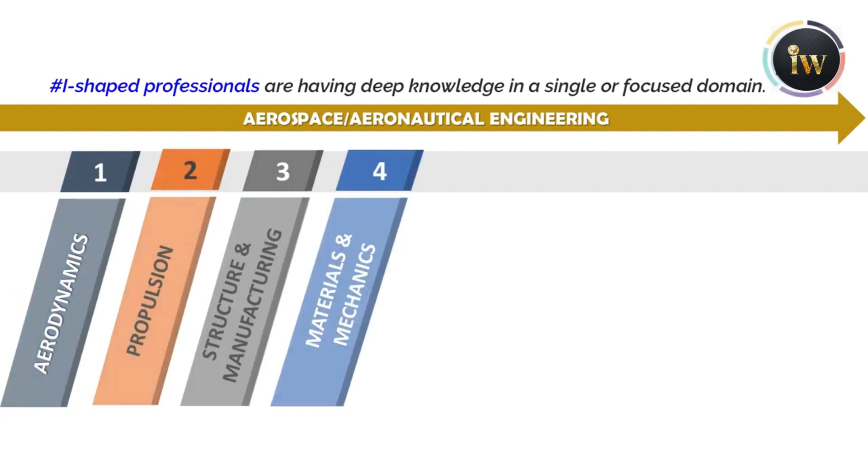T-shaped professionals means single or focused knowledge with collaboration across domains. For example, how the applications of aerodynamics are widely implemented in supersonic, subsonic or even hypersonic fields in the aerospace domain.

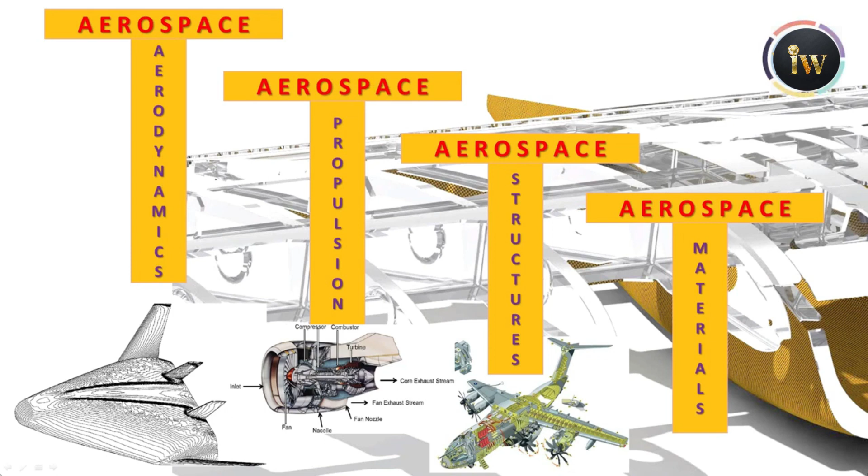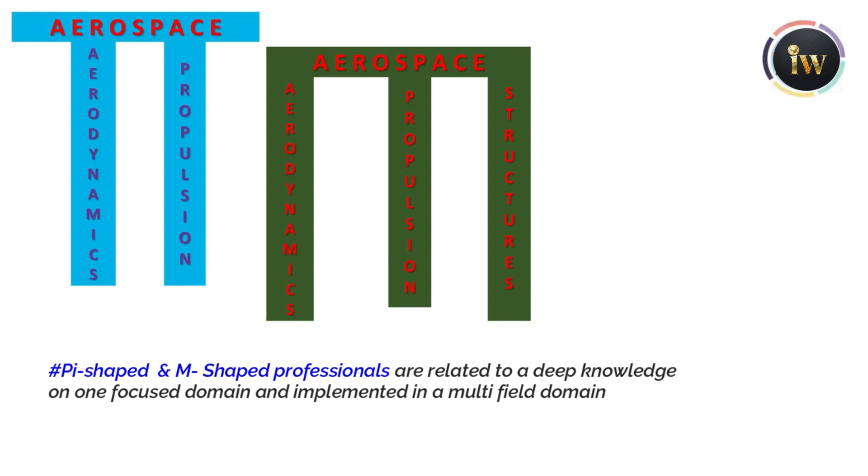Now talking about pi and M-shaped professionals, they have deep knowledge in one focused domain but implemented in a multi-field domain. It's like compiling a combo of aerothermodynamics, structures, controls into one research topic. For example, aerodynamics and aerothermodynamics of a re-entry vehicle. Here you must have knowledge of more than one domain, like aerodynamics as well as propulsion, so it will be considered a pi-shaped professional.

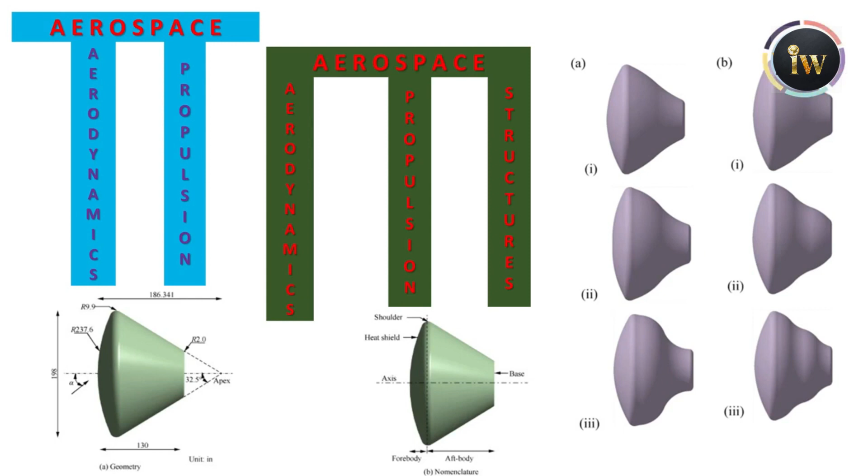Today I will discuss possible aerospace research topics or thrust areas based on I, T, pi and M-shaped professionals of each aerospace domain like aerodynamics, propulsion, structure and manufacturing, materials and mechanics, design and control, space engineering, aviation management and aerospace medicine.

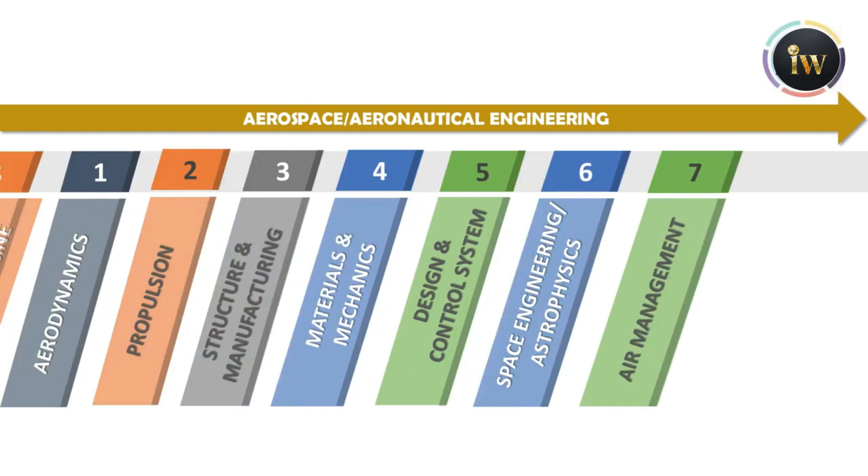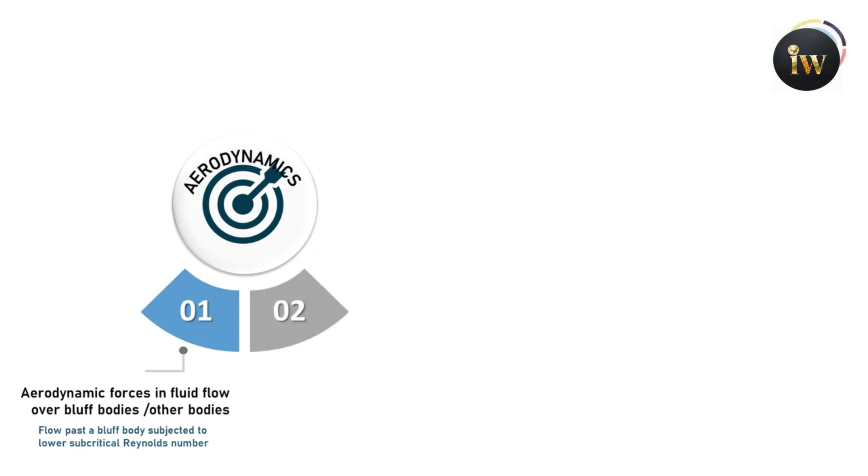Let's start with applied aerodynamics, which covers a broad range of research topics both in the aerospace domain as well as multi-field domains. Any research work on aerodynamics is evaluated either through scientific computing, CFD and numerical methods, or by experimental investigation. The most possible topics are aerodynamic forces in fluid flow over a bluff body or any other body, and second, unsteady flow or transitions and turbulence or vortex dynamics.

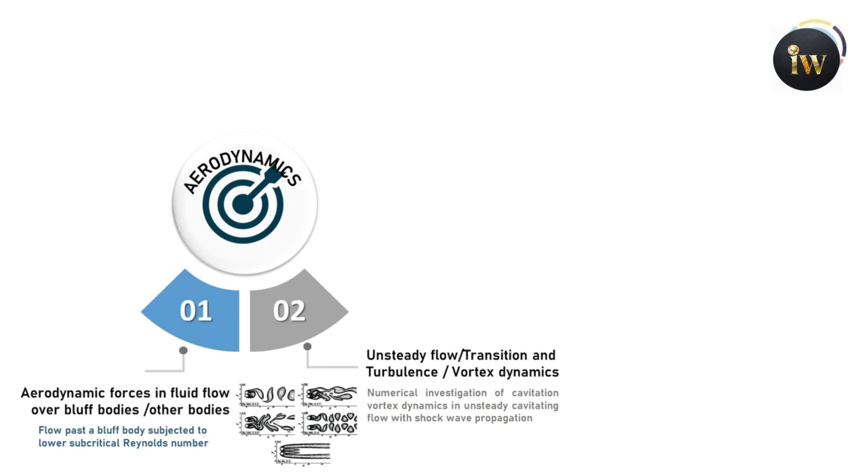For example, numerical investigation of cavitation vortex dynamics in unsteady cavitating flow with shock wave propagation. Then internal flow or flow control, which can be either active or passive control of jets, like large eddy simulation of base drag reduction using jet boat tail passive flow control.

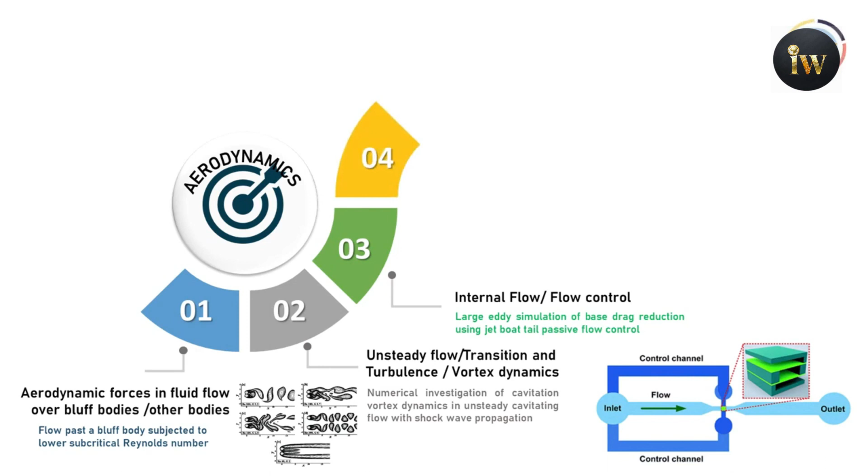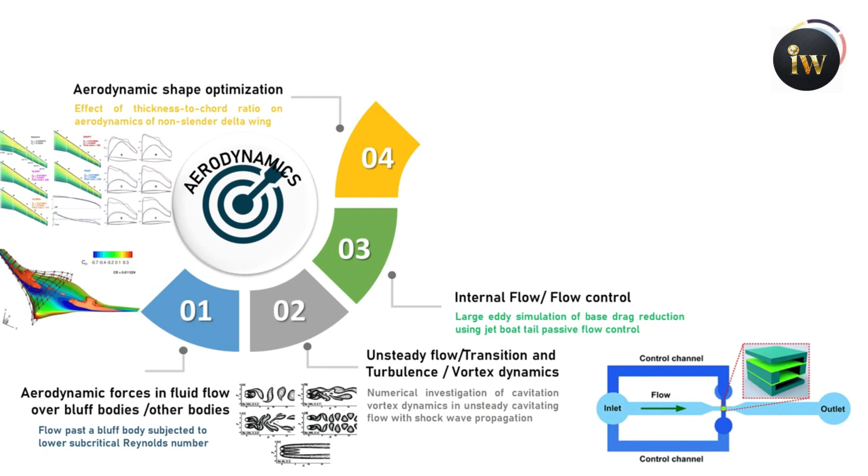Then aerodynamic shape optimization, widely used in the aerospace field, such as the effect of thickness-to-chord ratio on aerodynamics of a non-slender delta wing. There's a lot of research you can do on various configurations of the delta wing too. Then experimental fluid mechanics or wind tunnel techniques in subsonic, supersonic or even hypersonic fields.

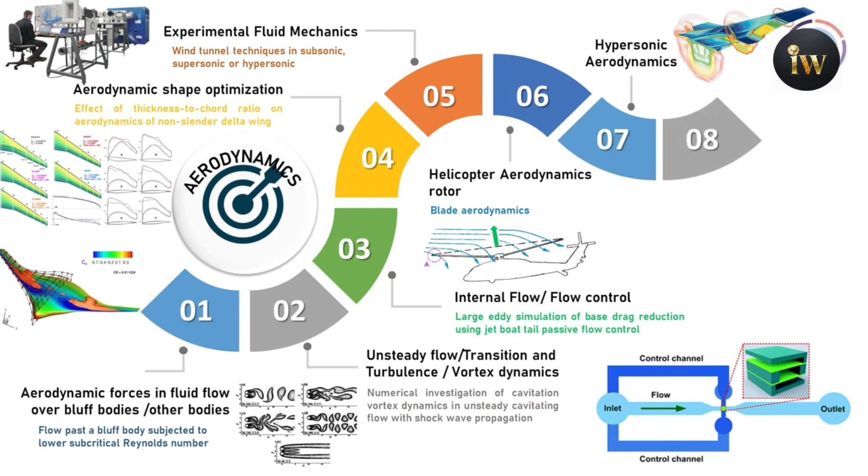Even missile aerodynamics, for example, investigation of acceleration effects on missile aerodynamics using computational fluid dynamics. There's ample research going on. Such amazing topics you can also pick, like effects of rainfall on aircraft aerodynamics or crosswind effects.

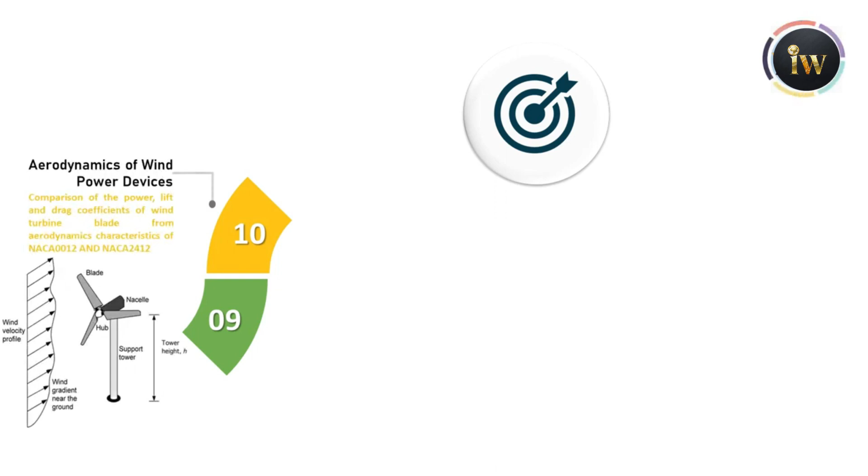Now I will tell you some aircraft aerodynamic concepts applicable in other fields, like aerodynamics in wind power devices, such as comparison of power, lift or drag coefficients in wind turbine blades, or other aerodynamic characteristics varying the airfoil.

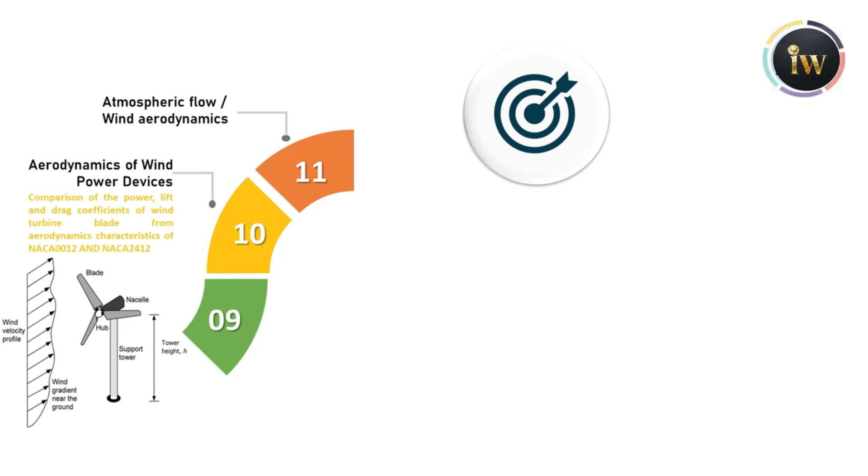Then talking about atmospheric flow or wind aerodynamics, again some more precise research can be done on microfluidics. Then aerodynamics of road vehicles like sports cars or even high-speed trains, bicycles.

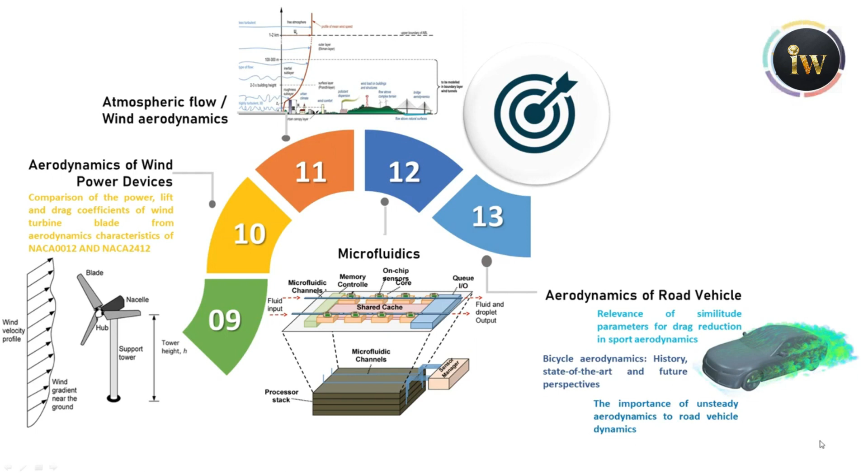Actually, these are industrial applications of aerodynamics. There's a lot of research going on, like relevance of similitude parameters for drag reduction in sports aerodynamics or even bicycle aerodynamics, even the importance of unsteady aerodynamics to vehicle dynamics. There are a lot of industrial applications going on too.

Then even marine vehicle dynamics, building or bridge dynamics. You might have heard about the Tacoma bridge incident. That has also been further studied in terms of bridge dynamics, and now we have made better advancement in the research. All these individual topics represent the I-shaped professional.

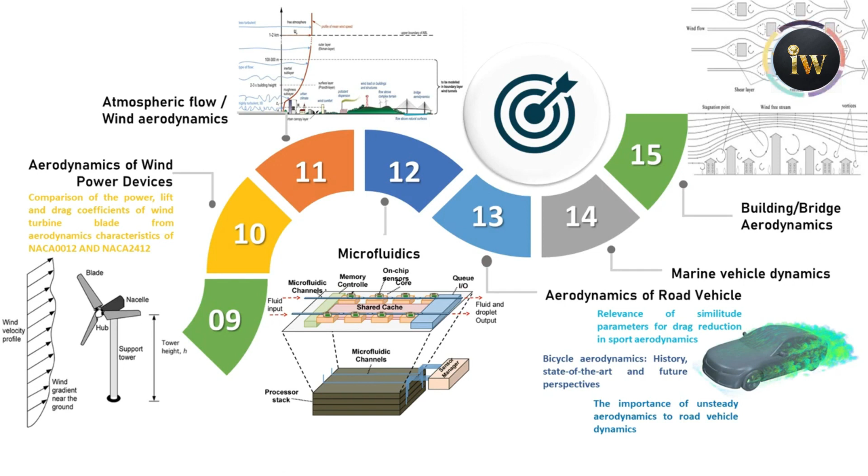Suppose a person is combinedly working on blade dynamics along with atmospheric flow and experimental fluid mechanics, they will probably fall under the T-shaped professional. In upcoming talks, I will give you examples of how research work can be compiled with other domains like propulsion, structure and so on. So stay tuned till the end of the video.

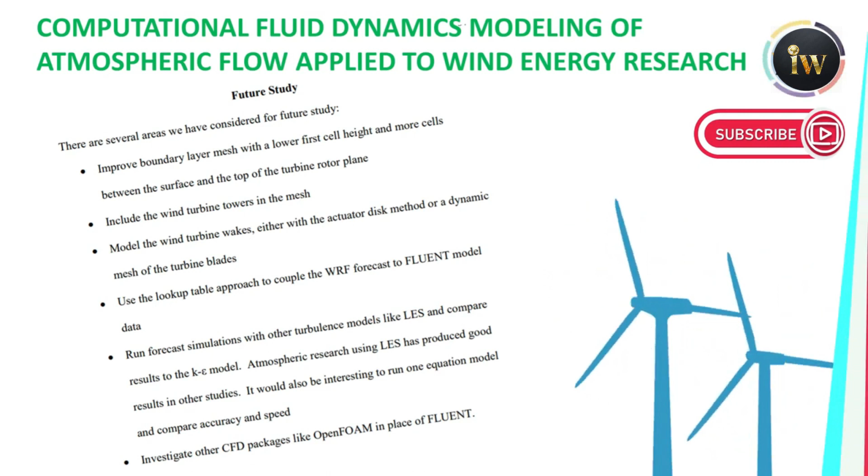Next, I will move to the propulsion research topic, sometimes also called the thermal and propulsion core. In air breathing propulsion, you can now work on inlets, diffusers or nozzles for various flight speeds. Even advanced inlets and nozzles for subsonic, supersonic and hypersonic vehicles you can work on.

Even combustion fuel flow reactions can also extend to fire dynamics. Then even turbo machinery, where work defines on the compressor and the turbine.

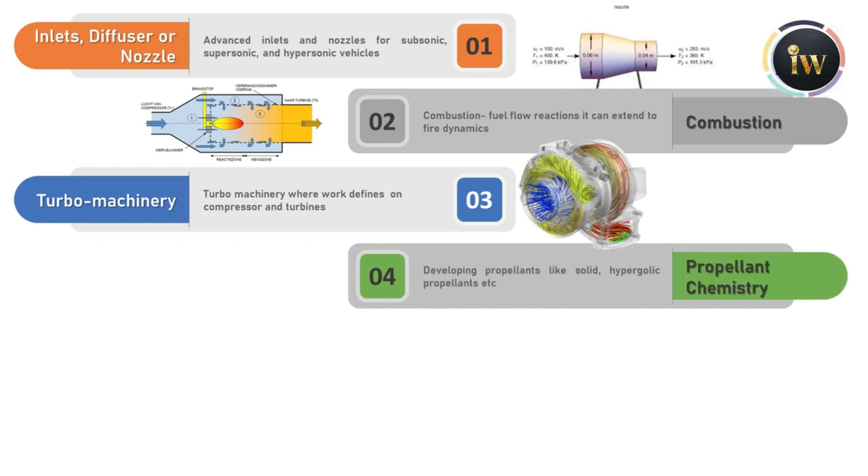If I talk about rocket propulsion, there is a lot of work going on in developing propellants like solid, hypergolic, monopropellants. Sometimes this is also known as propellant chemistry. You can do research on it.

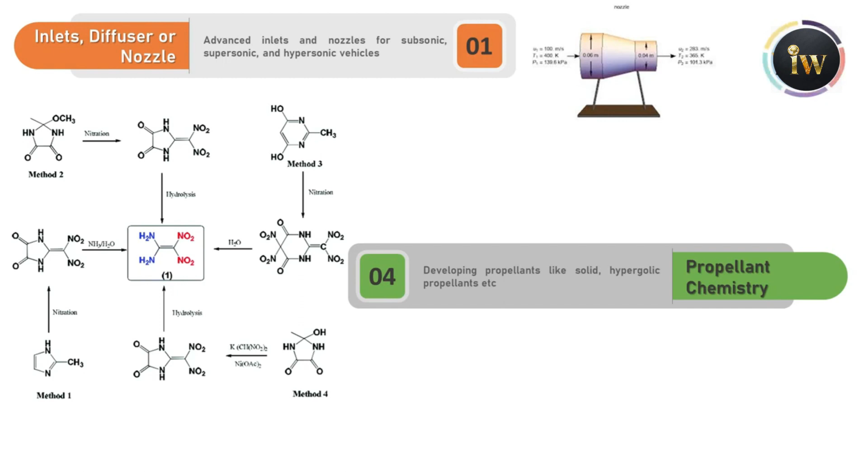Then electric propulsion. Now microgravity, where NASA is experimentally working, and even CubeSat, all of you might be knowing. That is also a part of electric propulsion.

Then talking about thrust vectoring, either primary or secondary, it is widely used in rocket propulsion or in space, either for the rocket or the spacecraft.

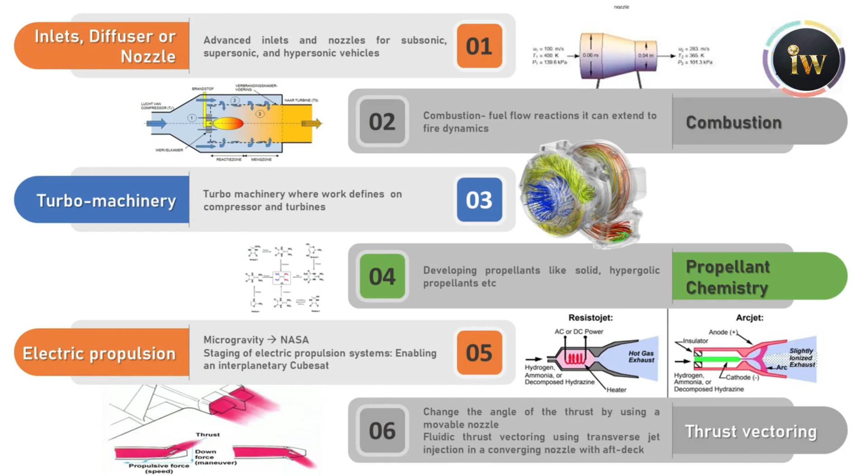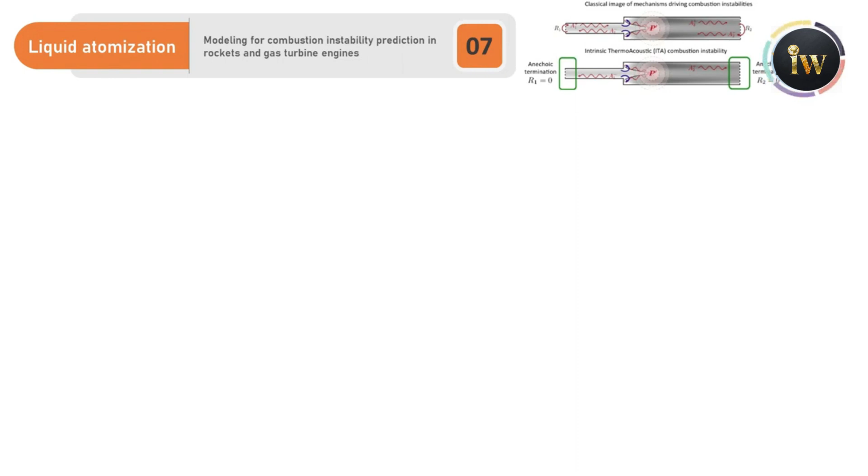Then coming to liquid atomization and spray combustion, this also plays a very important role. Similarly, you can work on modeling for combustion instability predictions in rockets or even gas turbines.

Heat and mass transfer plays a key role either in air breathing or rockets, spacecraft, or even automobile industries. Then cooling techniques - when we talk about thermal, there must be some kind of cooling techniques. This is very important and also plays a key role, and cooling directly or indirectly affects efficiency.

So another work you can do is cryogenic applications. There are wide opportunities to work on cryogenic applications either in the engine or the fluid. You can work on this by various means.

Then another very special topic is bio-inspired propulsion, like biofuel. Basically it is a multidisciplinary profession where one needs to have an idea about vegetable oils or even aviation fuel and its composition. There is a lot of research going on since 2005, I think.

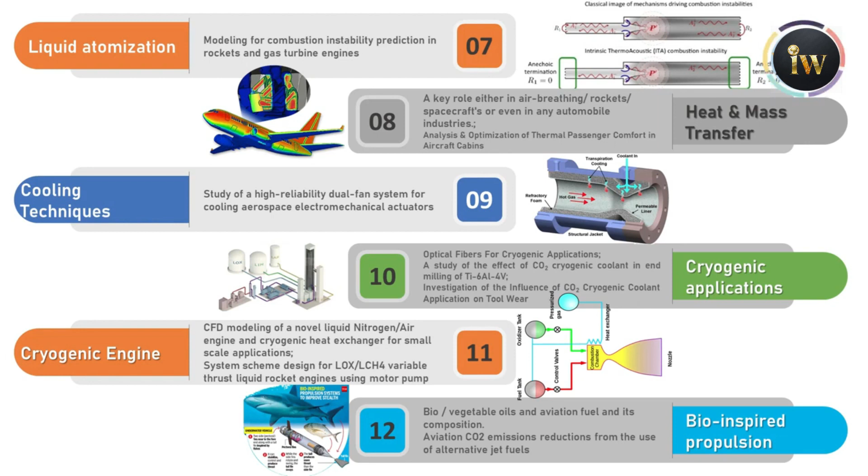Even some industries, aviation industries, are working on this. You can see an example: aviation CO2 emission reductions from use of alternative jet fuels. There is a lot more research you can do on it.

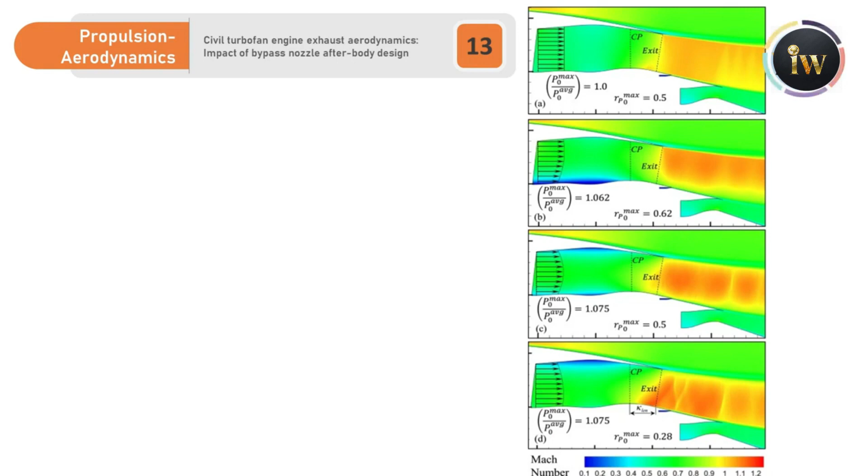But there are certain research topics where the movement of air is crucial to both the aerodynamic vehicle and the efficient engine, so it can't be isolated from aerodynamics and propulsion. Some research has been undertaken on civil turbofan engine exhaust aerodynamics. There is a lot of research going on; you can also take up one of these.

Then flame propagation and ignition in boundary layer flow. Then multi-phase reactions forming a complicated system, either in the form of gas-liquid, gas-solid, or liquid-solid interface.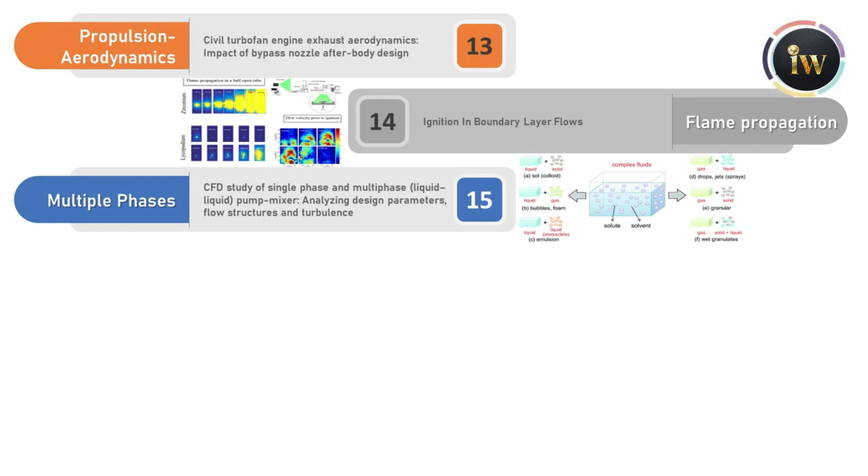There are also a lot of projects going on in CFD study of single-phase or multi-phase pump-mixers, or even in a rocket engine, when the cooling system is done in a cryogenic rocket engine.

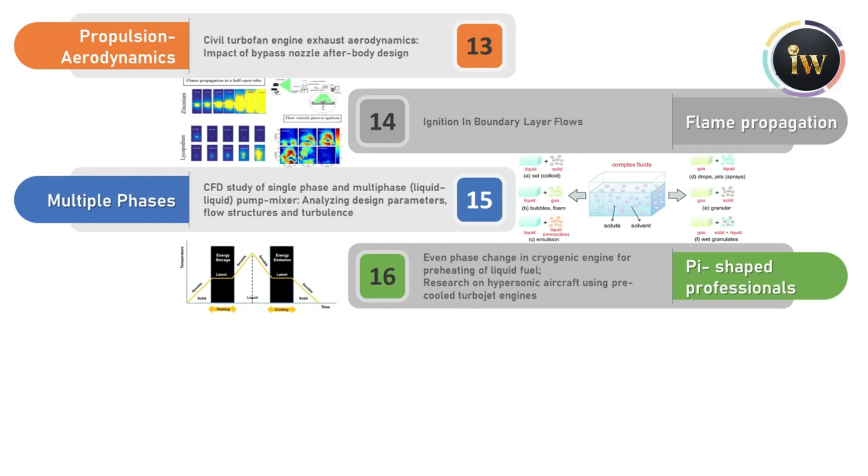After propulsion, moving to the structures topic, so do not get confused with materials - I'll be explaining materials separately.

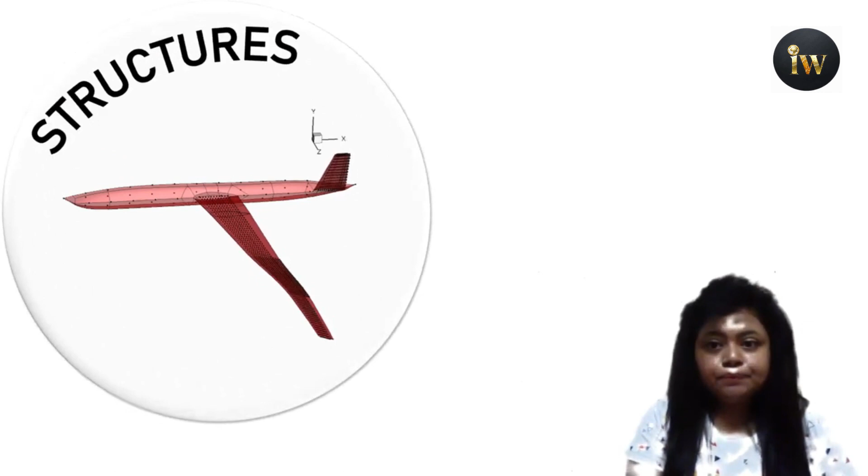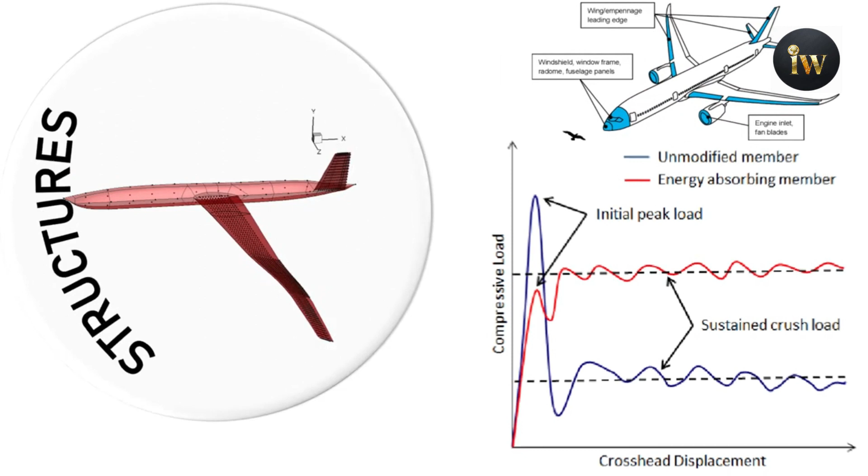Talking about the research topic on structures alone, it is a vast topic with many wide domains you can work on or categorize into, like structural health monitoring, fatigue and damage tolerance of aircraft structures or components, or parts of aircraft, nuts and bolts or whatever.

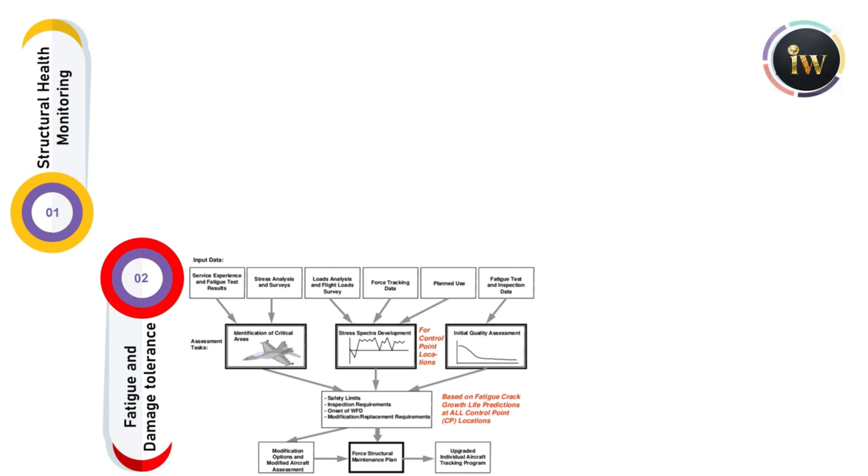Then morphing structures or multifunctional structures. This topic is highly active at present, and I think this is the future. If you are specialized in structures, you must take up this topic and work on it.

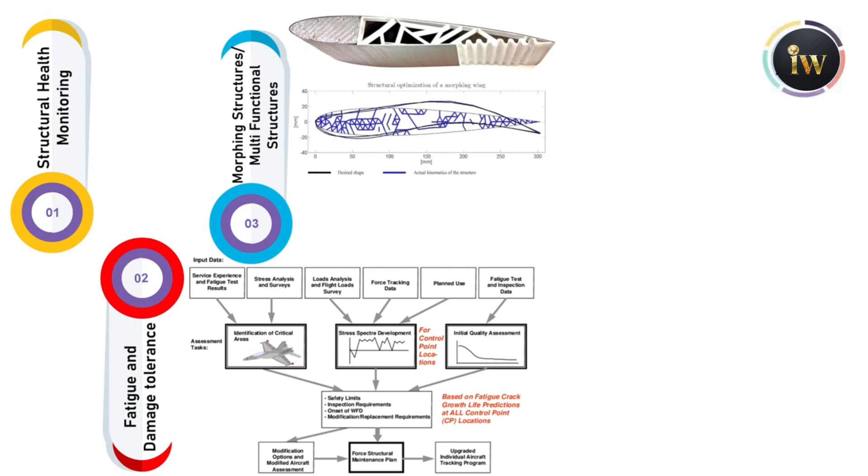Now developing composite structures - this is another developing area. I think this is also a very highly demanded topic.

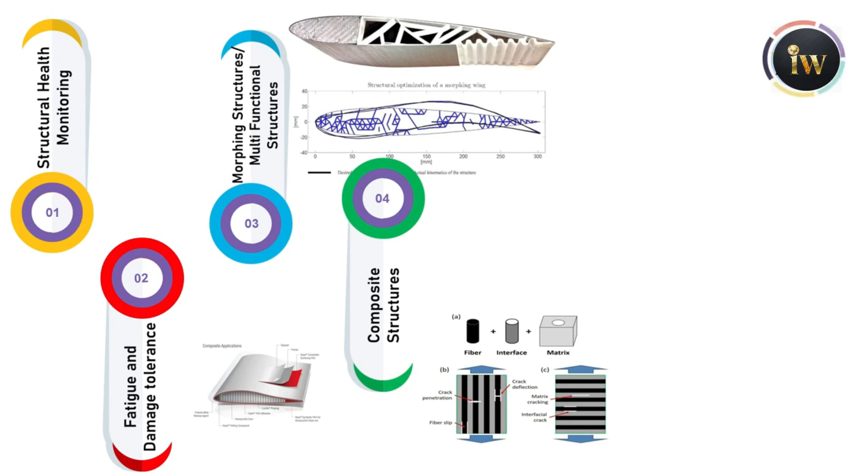Then coming to experimental techniques to know the properties of structures or analyze structural failure. Then micro or nano finishing surfaces in multifunctional structures or in general conventional structures - this also plays a very important role.

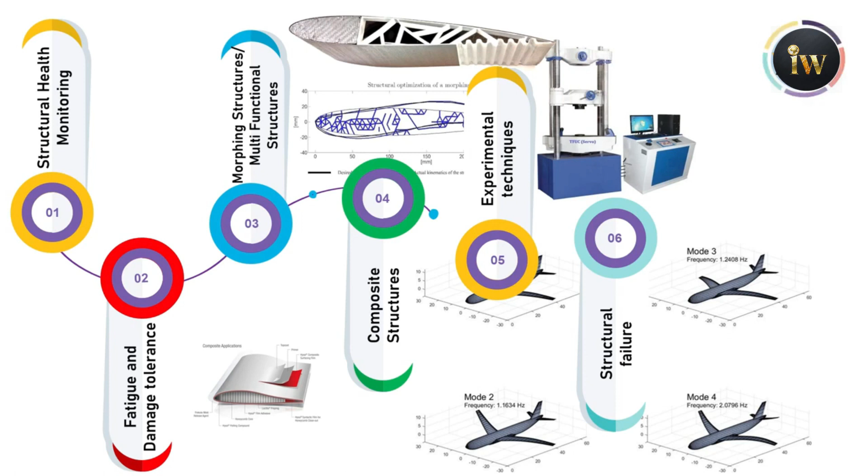In that, you can add one multidisciplinary profession angle, like you have one conventional structure and you make the same one with 3D printing. When you're making micro or nano finishing comparisons, you can generate comparison data and bring up some research out of it.

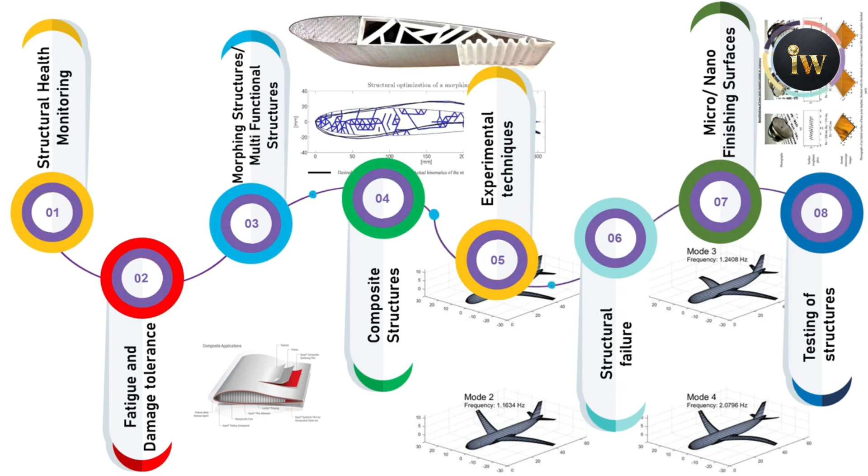Then testing a structure through various NDT techniques - this can also be performed, and let me tell you, there are ample NDT techniques. You can take up one of these techniques and get results. Keep in mind, in every case you need to apply adaptive finite element techniques and modeling tools or experimental techniques to evaluate your results.

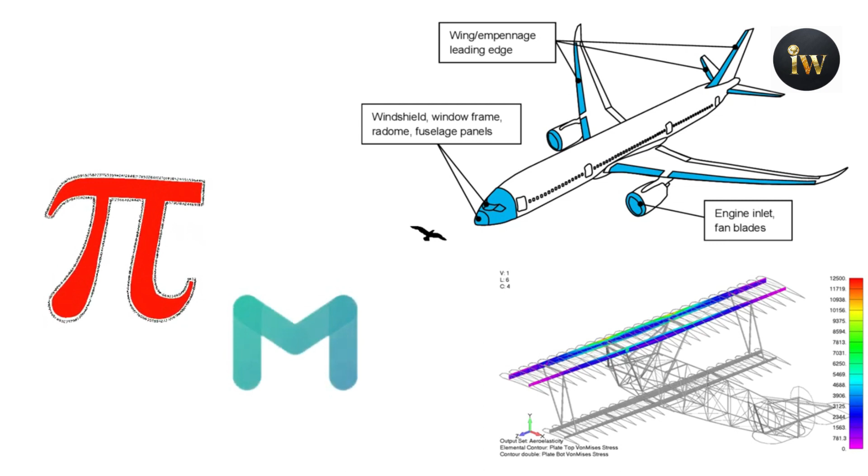Considering today's research, structures are more into pi-shaped or M-shaped professionals, where research work with aerodynamics, propulsion, material, design, manufacturing, and controlling are all combined together. Let me highlight the more interesting and present research progress or the nearing future.

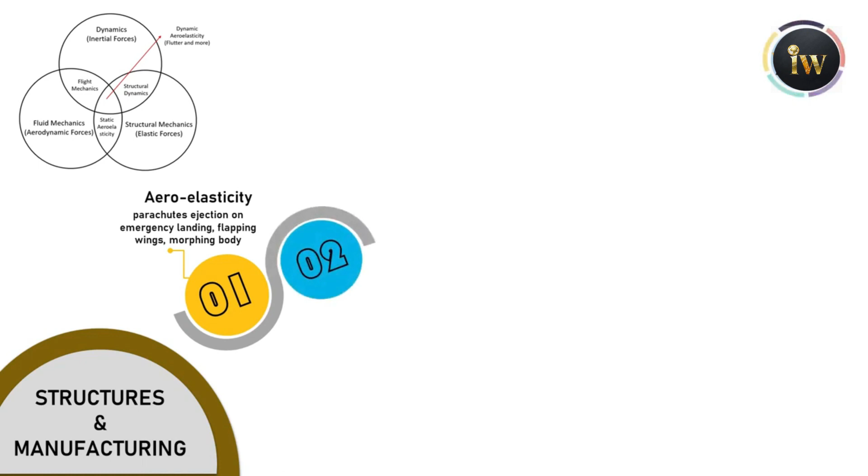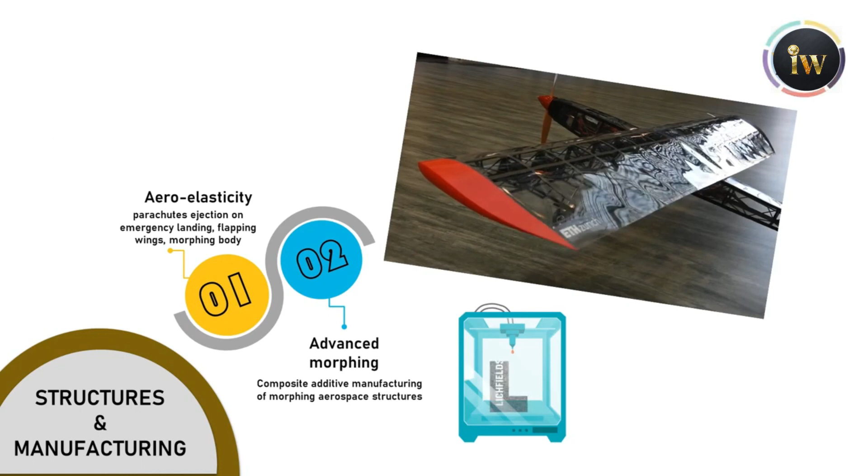The oscillating airfoil dynamics play a key role in aeroelasticity topics. Even in morphing, some research has been undertaken, like composite additive manufacturing of morphing aerospace structures. This additive manufacturing also plays a key role in the structures group, compared with conventional manufacturing. 3D printing technology has wide scope to reduce weight compared to conventional manufacturing.

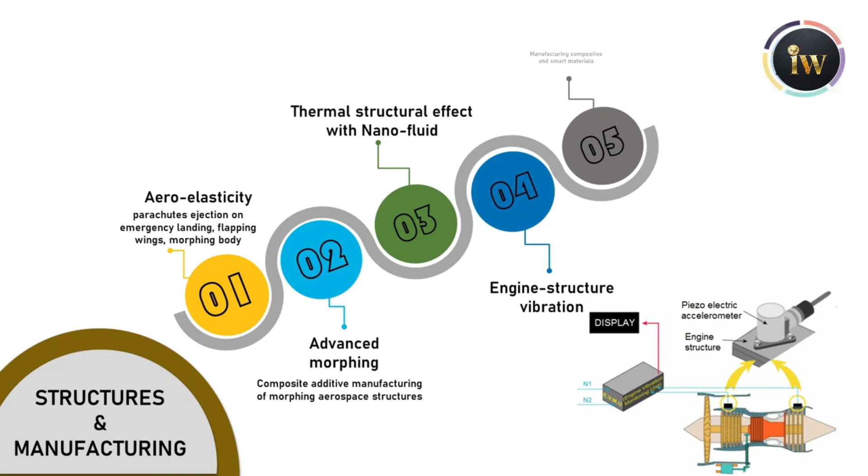Then, nanofluid for cooling thermal structures and its impact. Engine structure vibration due to instability combustions. Then manufacturing composites and smart materials with various types of processing. Then computational aero engine noise suppression.

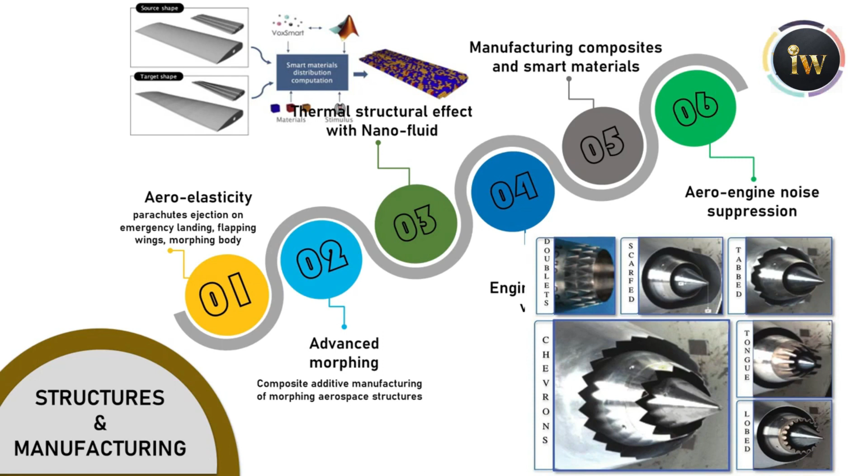There are a couple of areas with wide scope of opportunities to do research on this pi professional. Then talking about a correlated topic with structure is aerospace materials and mechanisms.

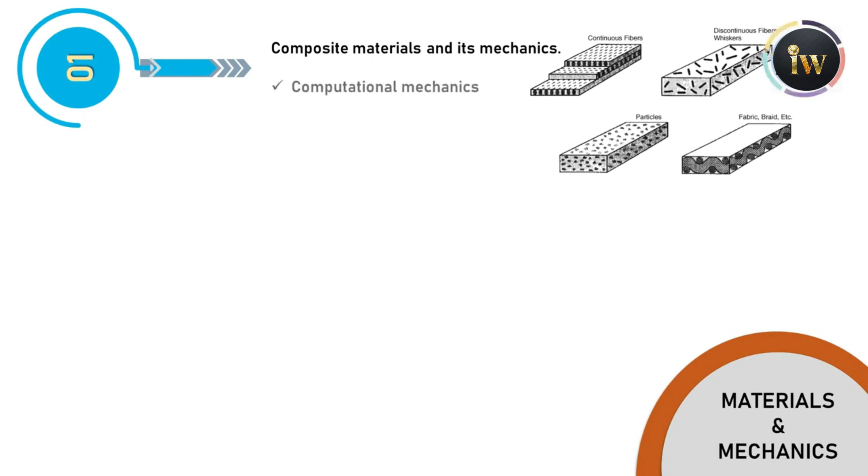There are a wide variety of opportunities and scope to work on composite materials and their mechanics. Talking about mechanics, there are various forms like computational mechanics, experimental mechanics, multi-scale methods, and thermomechanics. You can work on any sort of mechanics of a material.

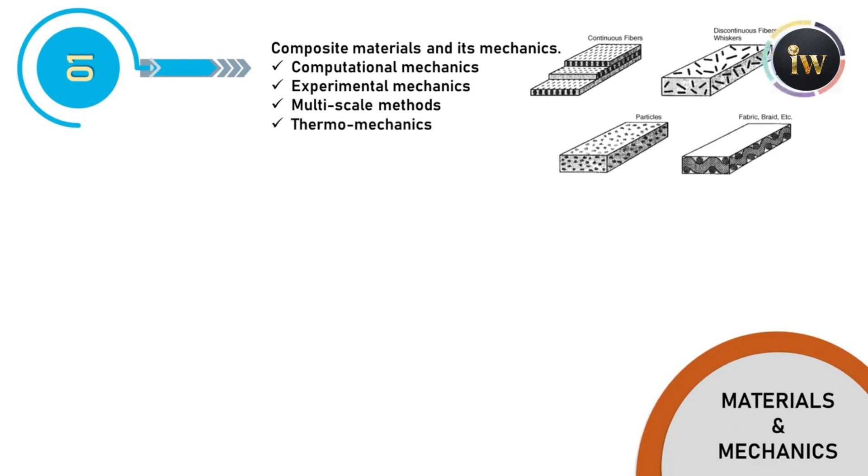Now talking about the next material, nanomaterials, then high temperature materials, then alloys such as aluminum-based alloys, magnesium-based alloys, titanium-based alloys, nickel-based alloys - ample alloys you can work on.

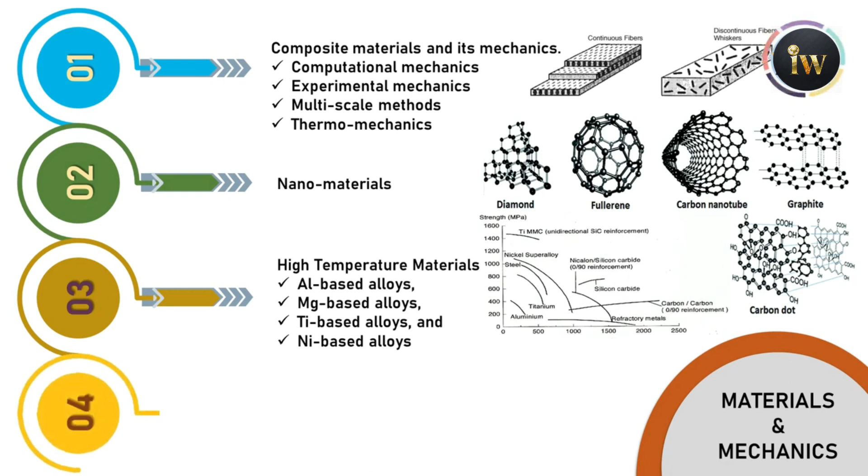Then the smart and multifunctional materials, shape memory alloys and materials, then magnetic data-storage materials. Now this has a wide range of applications, or you can say pi-shaped professionals.

Similarly, electronic packaging materials. Then there are various space materials, like materials used in batteries to sustain energy for a longer period of time.

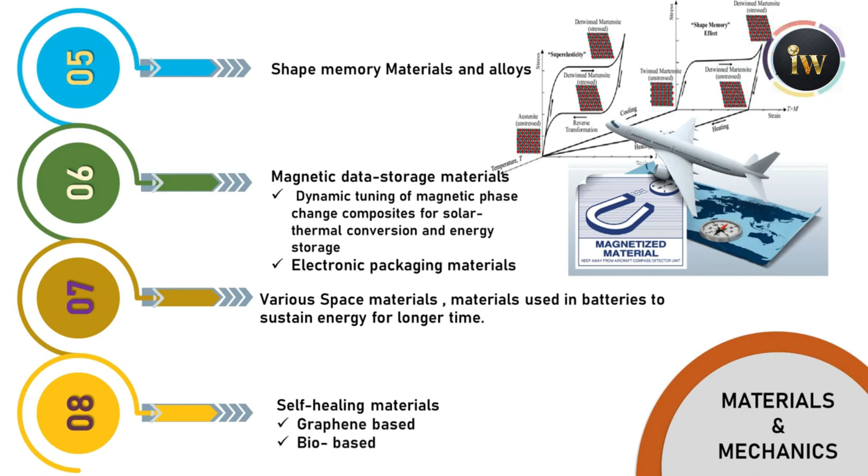One very special and unique work you can do is self-healing material. At present we are also doing graphene based, but nowadays more researchers are working on bio-based self-healing material, because fossil fuel resources are going to get exhausted and oil prices are going to rise. Upcoming research is on bio-based self-healing material.

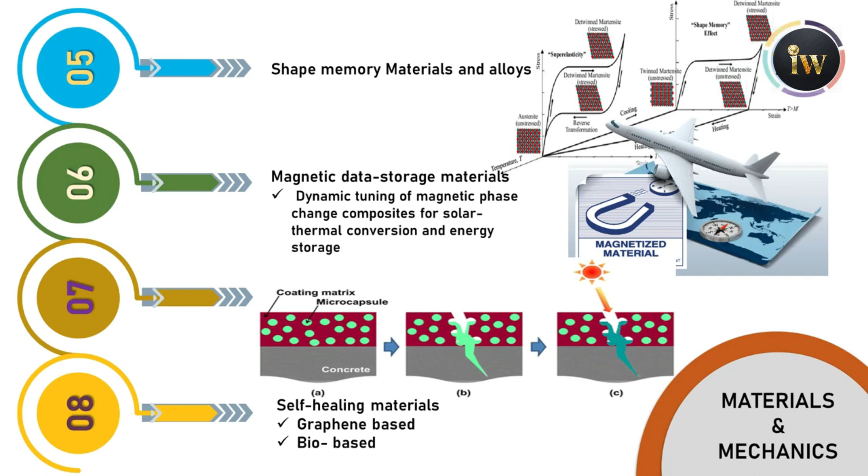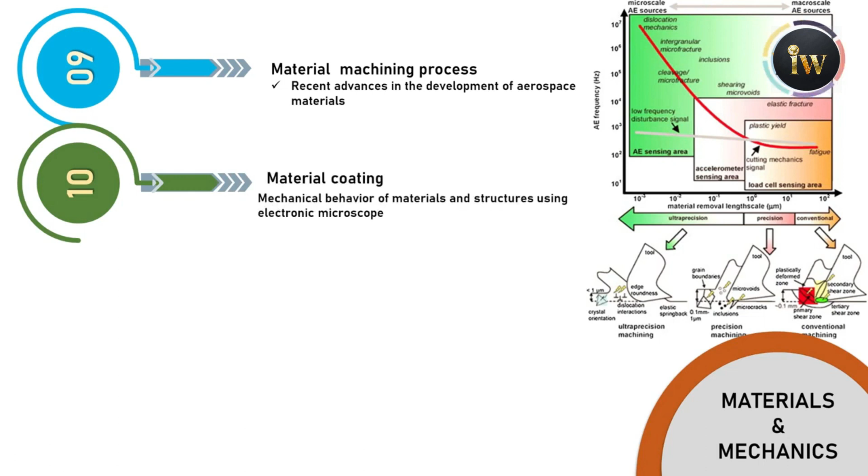Then material machining processes - there are many types, or recent advances in the development of aerospace materials you can work on. Then one more thing: special material coatings for thermal insulation or effective cooling.

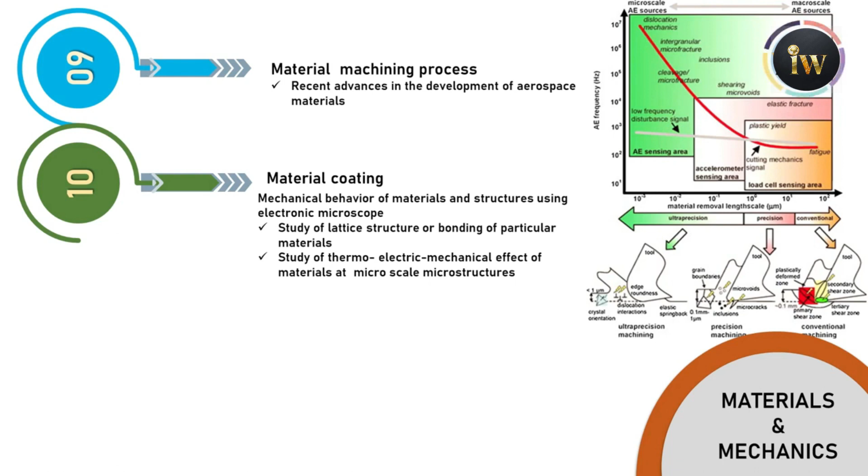There are also many opportunities, like finding out the mechanical behavior of unique materials and structures using an electronic microscope. Then study of lattice structure or bonding of particular materials. Study about thermoelectrical mechanical effects of material at a microscale, microstructures.

Now study the effect of metamaterials on aeroacoustic properties, like radar absorbent material. Most aerospace people will be knowing what this is and where it's used - called RAM material sometimes.

Then multifunctional material systems to control shock, vibration, and sound, like damping assessment of new functional materials - aerospace materials, which comes under the pi-shaped research professionals.

Then bending mechanisms for morphing aerospace applications. Then calculation and analysis of stealth and aerodynamic characteristics of various aircraft or structures. This also plays a very important and key role - it's also a type of pi-shaped professional, where both design knowledge is required, along with aerodynamics, propulsion and material.

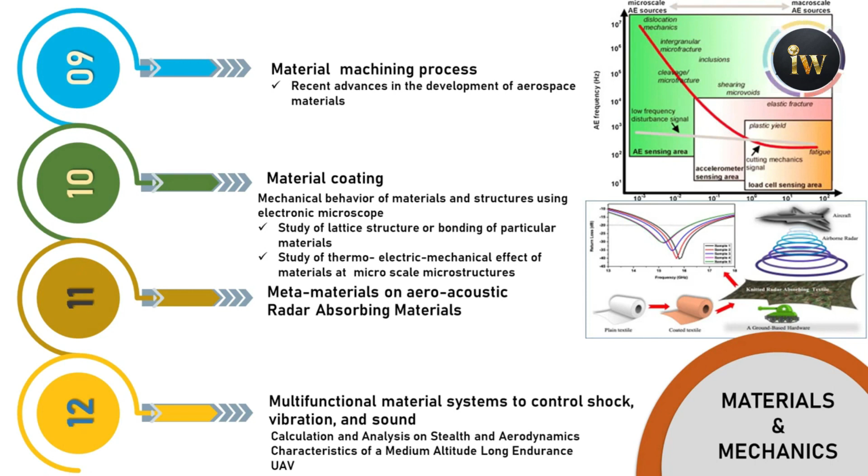Now after aerodynamics, propulsion, structure and materials comes the design. It is a multidisciplinary domain which comes under the pi-shaped professional or M-shaped professional, because here we need to know about computational analysis, numerical methods, where it needs to transform and give an impact in a new way of design.

Sometimes it is being combined with structure and design, or design and manufacturing, or design and controlling. Accordingly, I have categorized it into 4 forms.

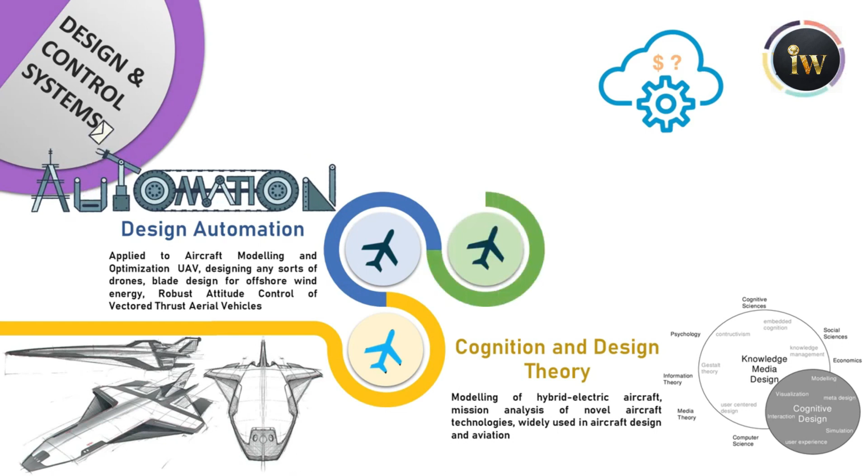Now talking about sustainable design and efficient engine design for fuel efficiency or compatibility with biofuel systems - such kind of design can be seen as sustainable design. You can also work on recent advances in fuel cell based propulsion systems for UAVs, since it's mostly used in UAVs. There's ample research that can be done on sustainable design.

Now coming to complex system design - this can be robotic arms, landing gear mechanisms, or other mechanisms like fuel tank design, landing gear systems, aircraft systems, hydraulic, pneumatic. Such kinds of designs will fall under this complex system design.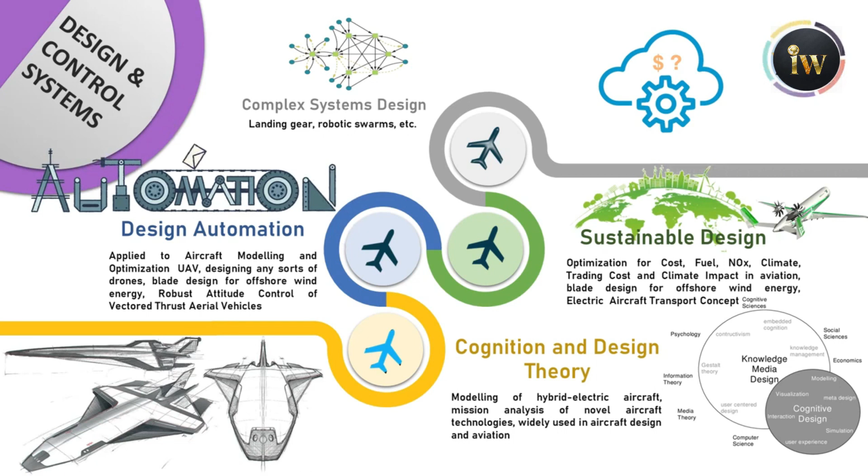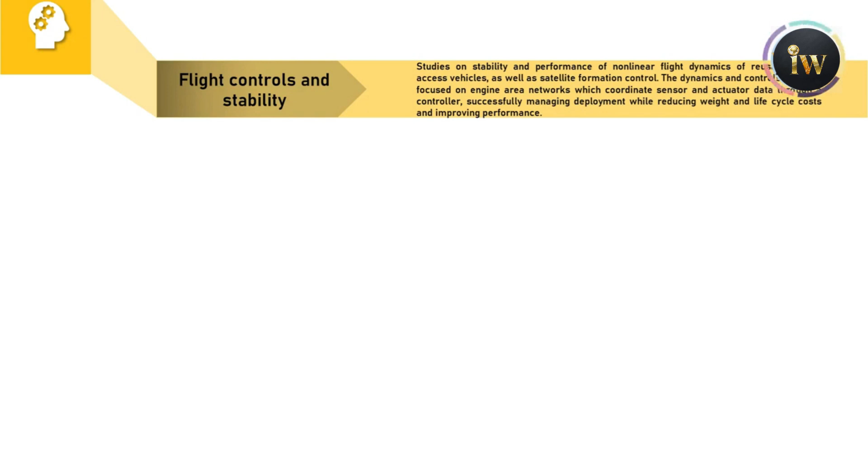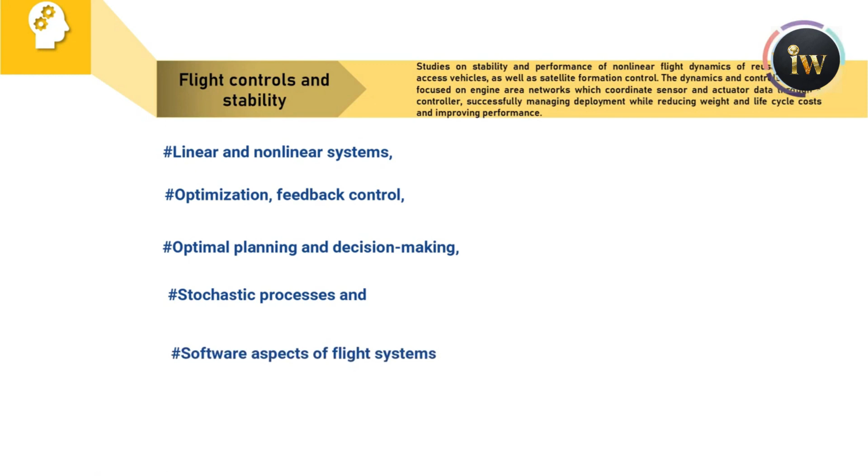Looking closely into another important field, control systems in aerospace, where you can choose a strong multidisciplinary, system-oriented approach that emphasizes linear and non-linear systems, along with optimization, feedback control, optimal planning and decision making, stochastic processes, and software aspects of flight systems. One must evaluate the computational and mathematical approaches through MATLAB and Python in most cases.

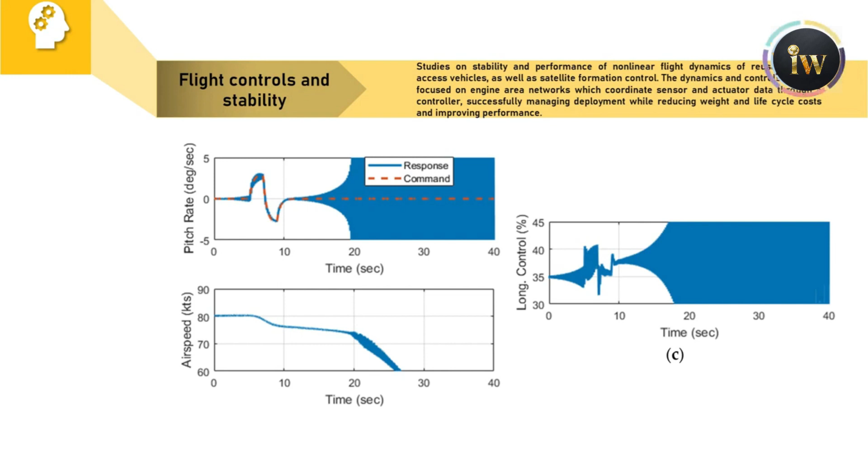Now looking at control systems, first the flight controls and stability. A study on the stability and performance of linear and non-linear flight dynamics can also be involved in this topic.

Then talking about autonomous flight systems, avionics systems include space robots, multi-modal sensors, and planning. It may be a structured, unstructured, or uncertain structured avionics system where you can maximize information extraction from sensor data, and accordingly make decisions and predict and monitor the health of this avionics system. There is a lot of work you can do on avionics systems.

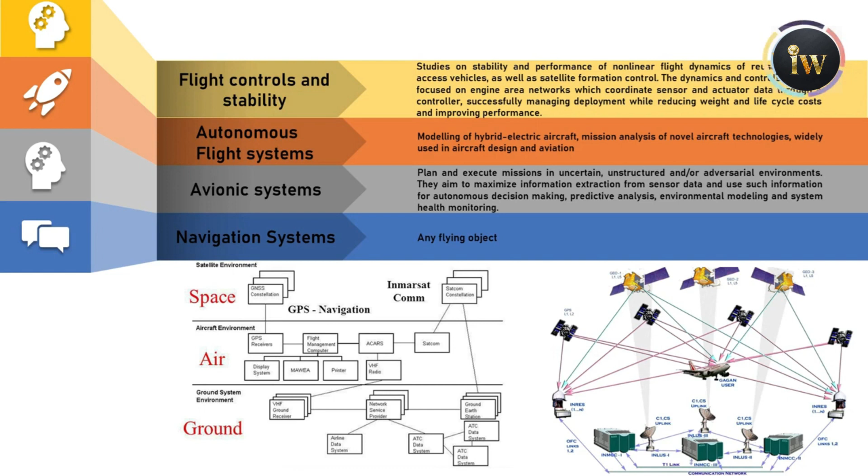Then talking about navigation systems, for any flying objects, from airplanes to helicopters, even missiles. Instrumentation also plays a wide role in this research field. Then dynamics and control of manned as well as unmanned air vehicles, there is ample research work here.

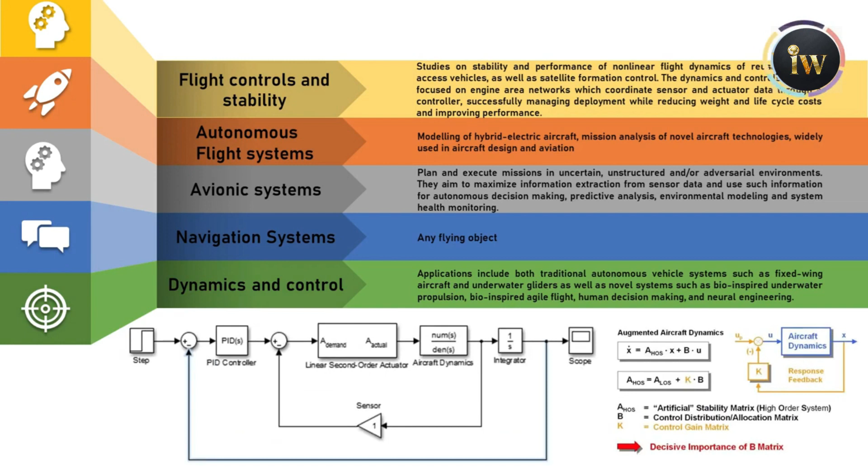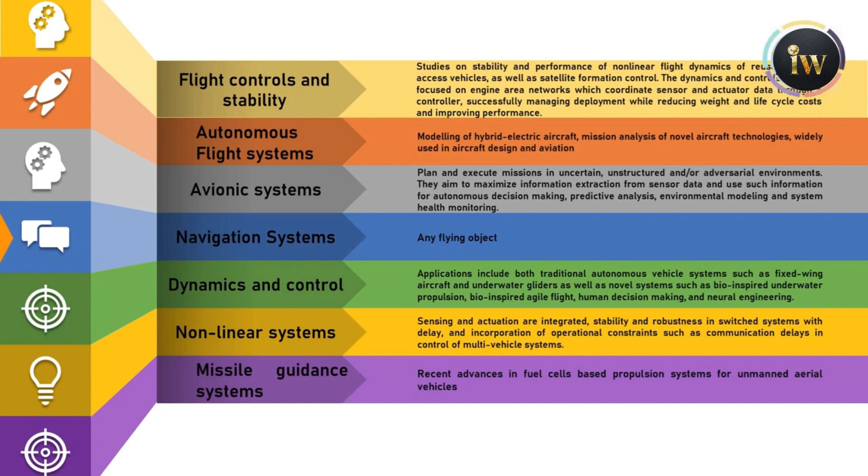As I've said, aerospace students can also enter specific topics like astrodynamics or orbital mechanics, such as space mission design, orbital debris in spacecraft and proximity operations, asteroid deflection, flight plan operations, and conflict detection and resolution for nanosatellites and space systems.

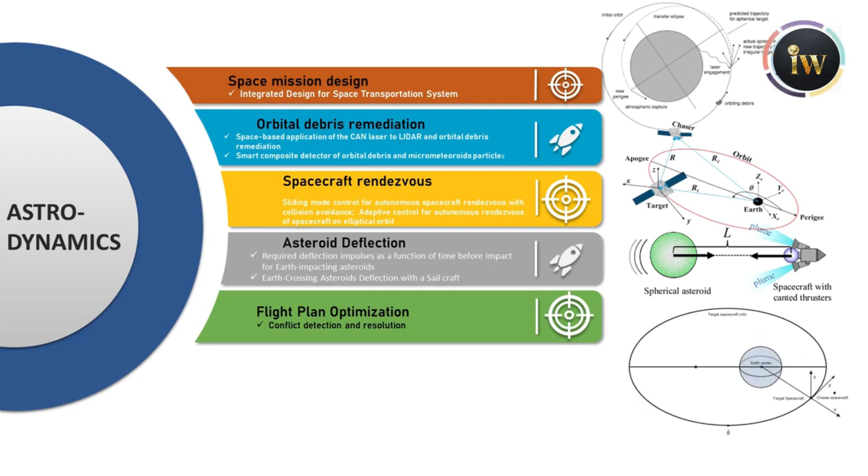Talking about space systems, you can also work on electrical propulsion systems and making small satellites for observing the earth and other objects in the solar system. All of this mostly comes under what a PhD professional would adopt.

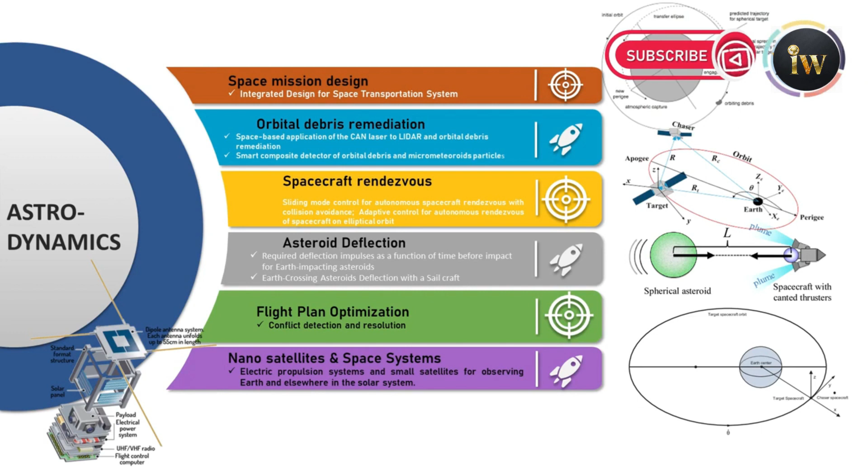Then coming next is aviation management, and possible research openings in aviation management. Very few students do research on such topics, so let us discuss what kind of topics we can cover in aviation management.

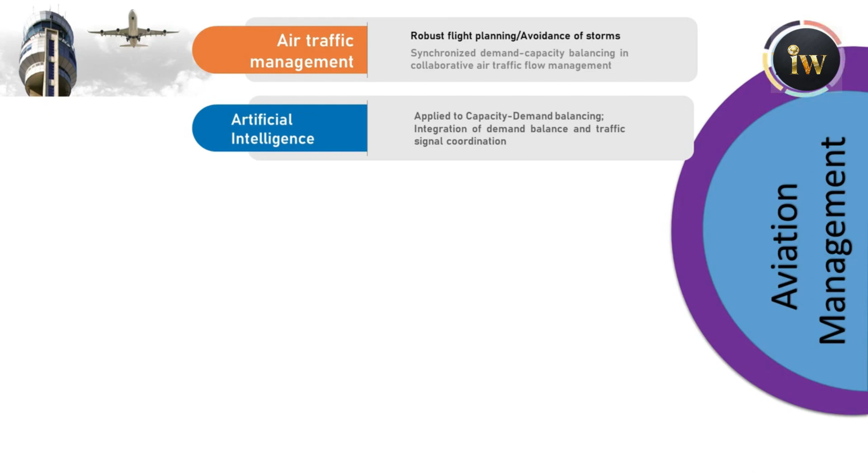You can do research on robust flight planning or air traffic management, how to manage air traffic by avoiding storms, artificial intelligence applied in capacity demand balancing, civil aviation airworthiness management, and space tourism.

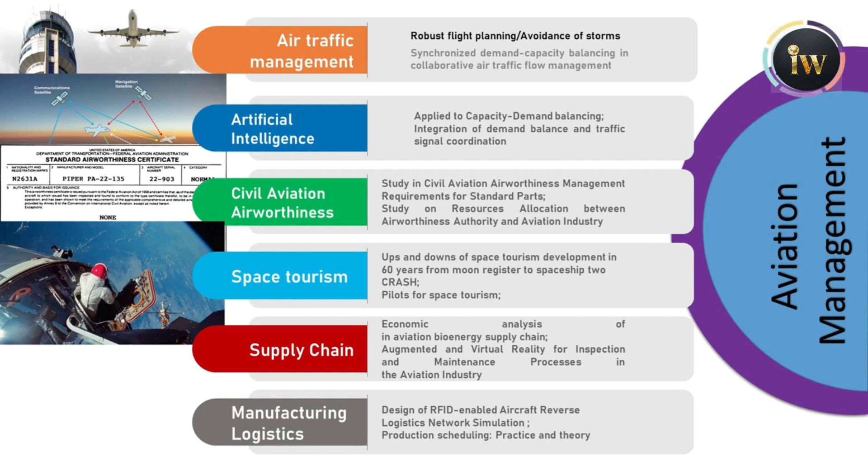Other topics include service logistics and maintenance management, supply chain and air transport management, or even aircraft manufacturing logistics. Very interestingly, I recently read an amazing research topic on integrating air and near-space traffic management for aviation and near-space.

If you are interested, there is also research in air and space law, but that is for legal people, not engineers. Looking into aviation or aerospace medicine research, it is not core aerospace engineering work.

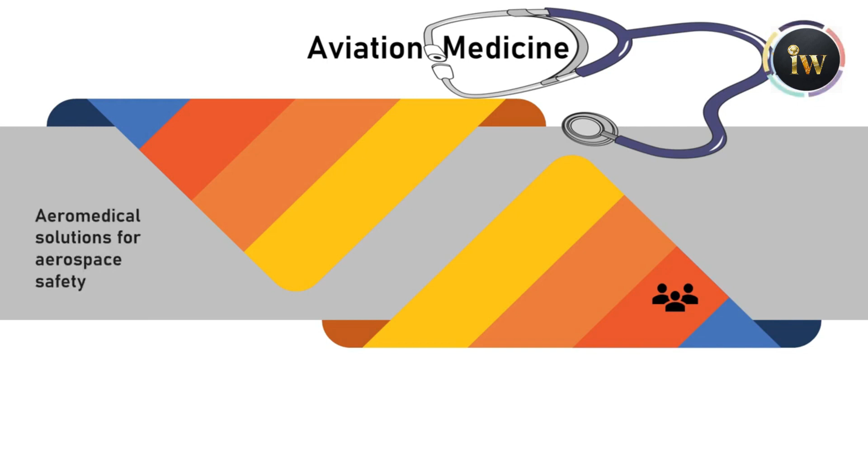Mostly MBBS people or doctorates work on such topics, and it seems quite interesting to me, so I thought I'd share a bit of idea about aerospace medicine. Some work done includes aeromedical solutions for aerospace safety, and aviation medicine covering illness and limitations for flyers.

At present, in 2020, COVID-19 is going on. In this area too, I've read an article like 'COVID-19 patients with respiratory failure, what we can learn from aviation medicine,' and career options in aerospace and aviation medicine, which you can also learn about.

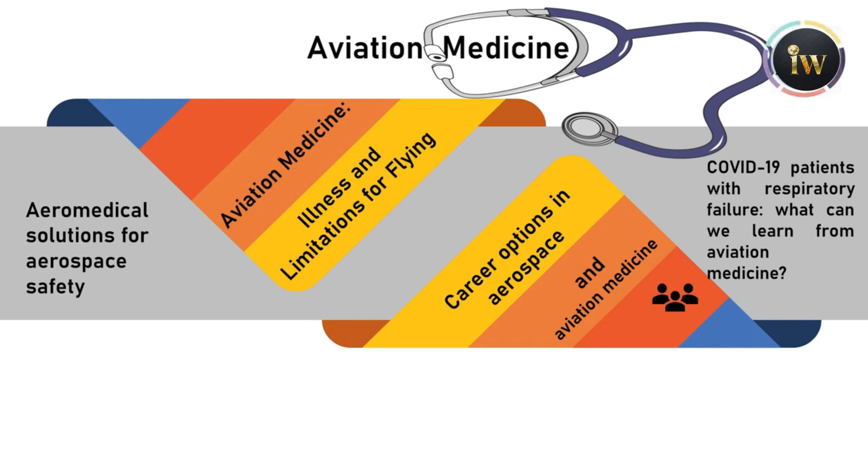So as a nutshell, what I'm saying is for each and every domain there are some drawbacks and scopes for future work that you can proceed with as a research work. I think this is going to be helpful for you to prepare your career according to your domain.